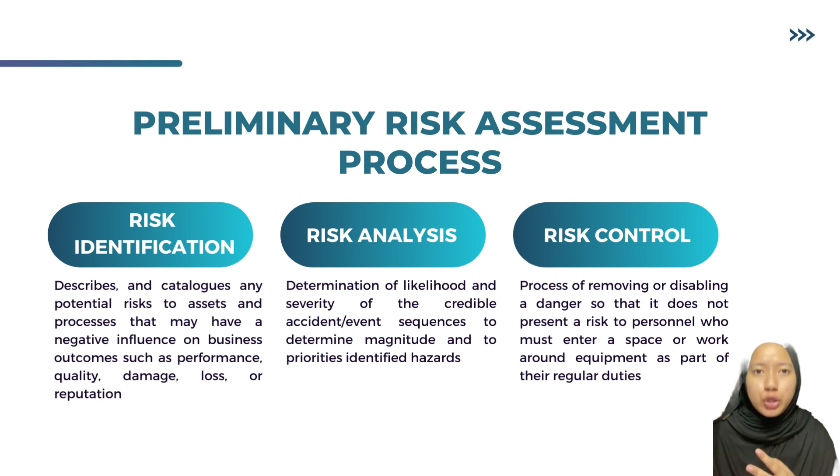The second one is risk analysis. We determine the likelihood and severity of the credible accident sequence to determine magnitude and to prioritize identified hazards. And lastly, risk control. This involves the process of removing a danger so that it doesn't present a risk to personnel who must enter a space or work around equipment as part of their regular duties.

In risk identification, we identify that there are four categories of risk. The first one is structural risk, which is related to the stability, strength, and condition of the structure itself. Second is environmental risk, which gives negative effects on the surrounding environment during the restoration activities.

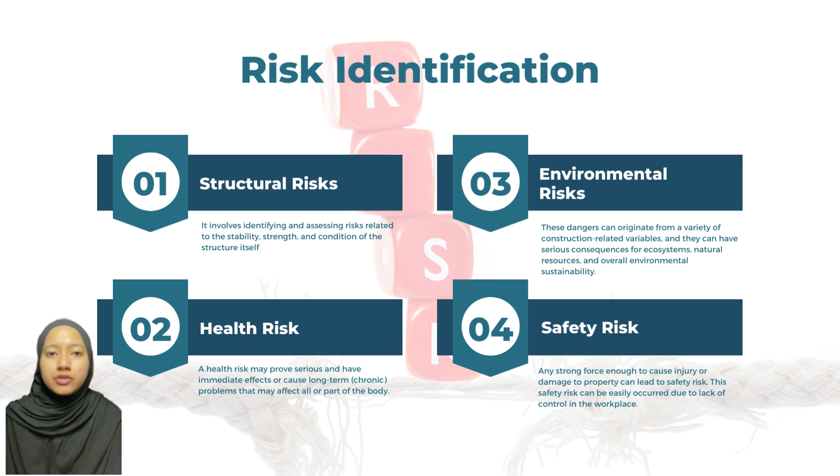Thirdly, health risk. It may have serious and immediate effects or cause long-term health problems that affect all or part of the body. Last but not least, safety risk, which involves strong force to cause injury to a person or property.

Risk assessment is the determination of the likelihood and severity of the credible accident or event sequences to determine magnitude and to prioritize identified hazards. To analyze risk, likelihood and severity will be used, and the result we present in a risk matrix to identify each risk for the Georgian mansion building. Risk can be calculated using the formula likelihood times severity.

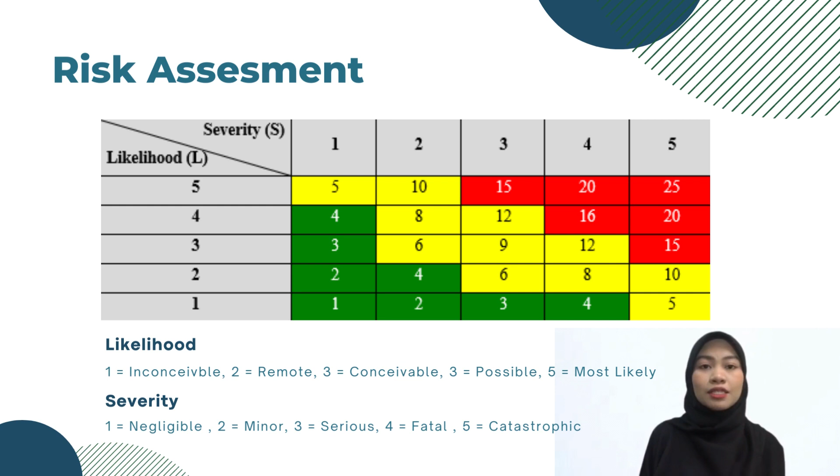A result with a value between 1 to 4 is labeled with green color, which means a low level, while the value of 5 to 12, which is labeled with yellow color, means moderate level. And lastly, the red color label, where the value is 15 to 25, is high level.

Risk control is a process to prevent danger from harming people, especially workers on the construction site that are exposed to the danger. Risk control is divided into several parts that can be seen in the pyramid. From the bottom, there is PPE, which is less efficient. PPE is used when alternative controls are ineffective and more protection is required. Personal protective equipment and clothes are utilized.

To correctly utilize and maintain equipment, workers must receive training to ensure they know how to use the PPE so that the PPE protects them from the risk. Next, moving to administrative control, a method or procedure designed to minimize exposure to a hazard. In most cases, administrative control uses a system of work to control the risk. For example, developing a procedure on how to operate the machinery safely, or limiting exposure time to a hazardous task.

After that, engineering control prevents the hazard from coming into contact with the worker, such as modifying equipment or the working space, using protective barriers and ventilation. The second control is substitution, where it is possible to complete the same task in a less dangerous manner. And the first method to control the risk is eliminating the hazardous job.

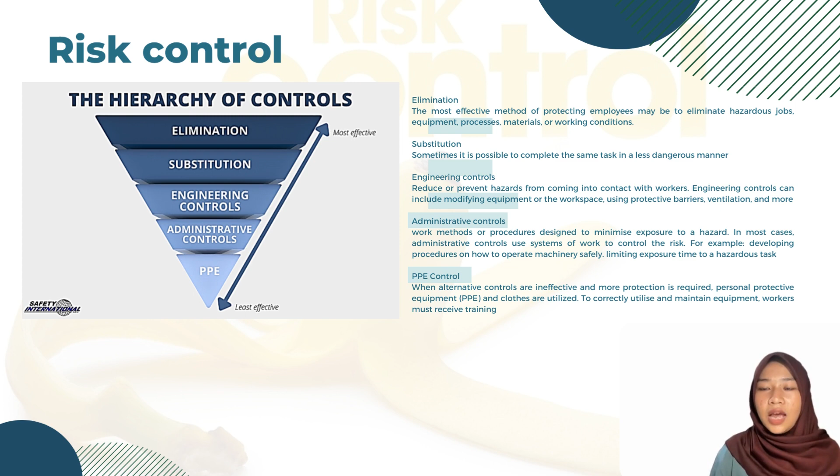HIRARC, hazard identification, risk assessment and risk control, provides a systematic and objective approach to assessing hazards and their associated risks that will provide an objective measure of an identified hazard, as well as provide a method to control the risk. Risk in Suffolk House, George Town, Penang can be divided into structure risk, environmental risk, health risk and safety risk.

Elements in the structure risk are structure assessment, structure repair and restoration of the architecture features. The elements in environmental risk consist of utilized machinery and equipment, also waste generation and management. Third is health risk, which consists of hazardous material removal, interior restoration and exterior restoration. Lastly, safety risk consists of electrical work, scaffolding and working at height, also the roof work.

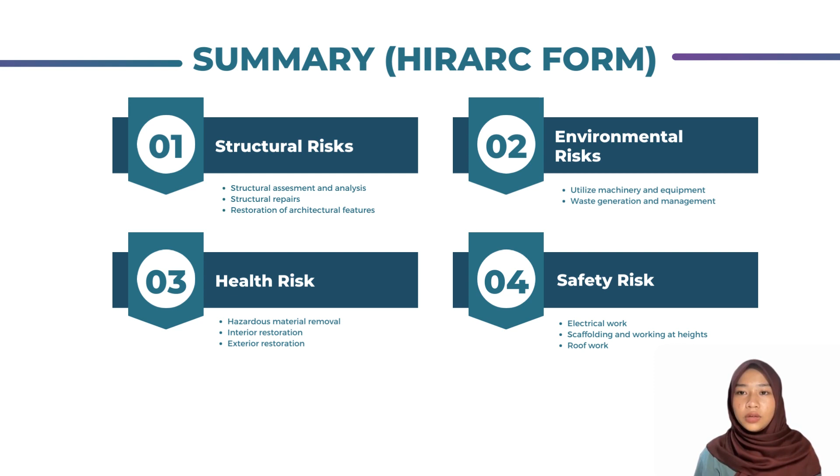Risk for the structure assessment and analysis. The work activity is structure survey and documentation. It has a potential effect of being struck by a falling object during the survey. Existing control is just using a safety helmet and other suitable PPE. The total risk analysis is 20, which is high, and this is controlled by engineering control to develop an emergency plan.

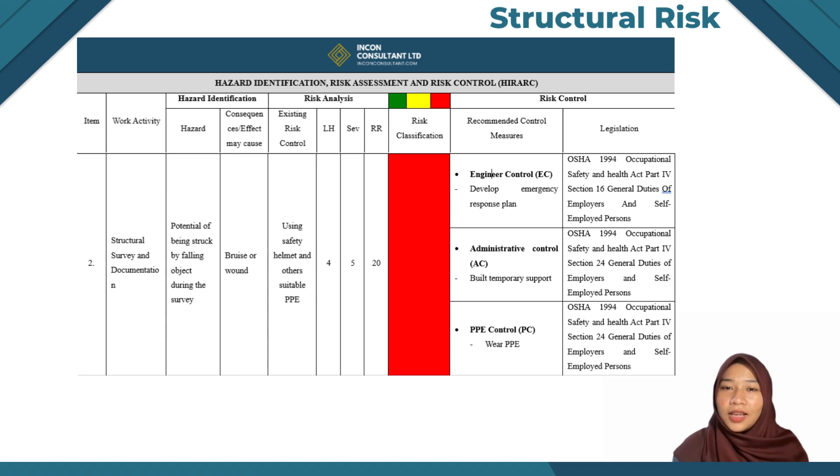The administrative control proposed is to build a temporary support, and the PPE control is the same as the existing control, by wearing suitable PPE with a suitable size. This can refer to OSHA Section 16 and 24.

Next is the main point, structure repair. The repairing activity is roof repair, which has the potential for a collapse or further damage. The effect from this hazard is a fall from height. This work activity gets 20, which is a high level. Risk control for this hazard is suggested as administrative control and PPE control.

Administrative control consists of following the structural engineer's orders, conducting regular inspection of the main structure, avoiding overloading of material during delivery, and documenting every assessment. For the PPE control, workers wear PPE such as a helmet and gloves. Each control refers to OSHA 1994 Section 15 and 24, duties of employer and self-employed person.

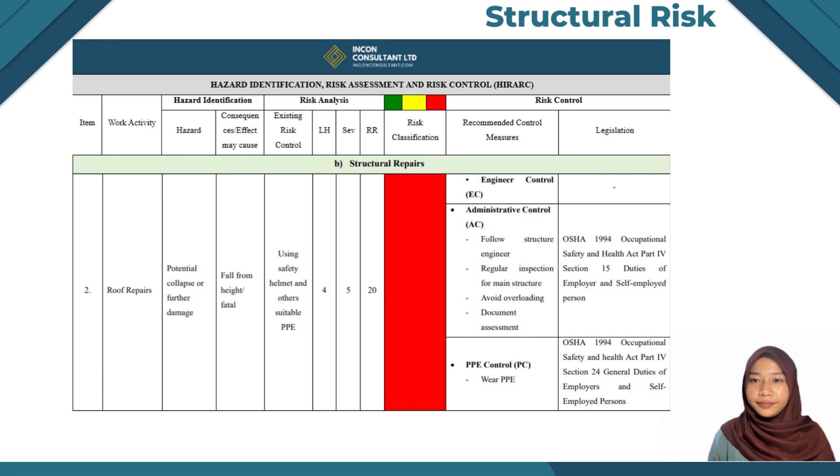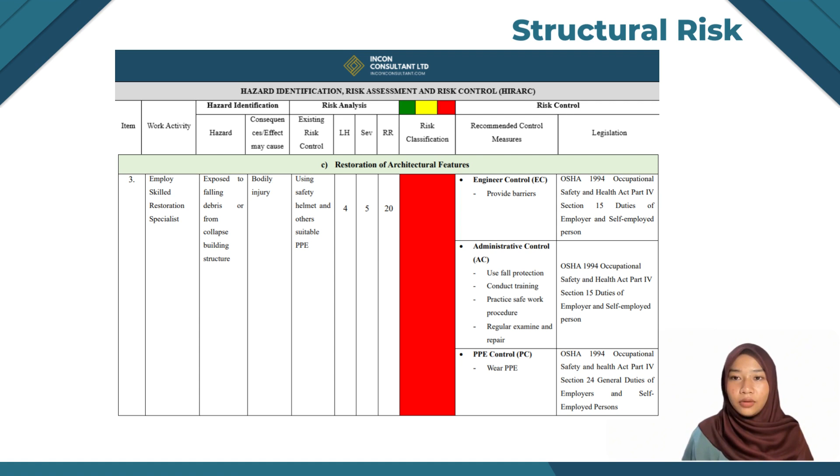The main environmental risk point is utilized machinery and equipment. The work activity that gets a value of 16, which is at a high level, is construction material handling. This work will be exposed to noise pollution. The effect of noise pollution will cause loss or impairment of hearing. Among the risk controls that can be taken to deal with this issue is the Occupational Safety and Health Act 1994, Part 4, Section 15, which is the duties of the employer and self-employed person.

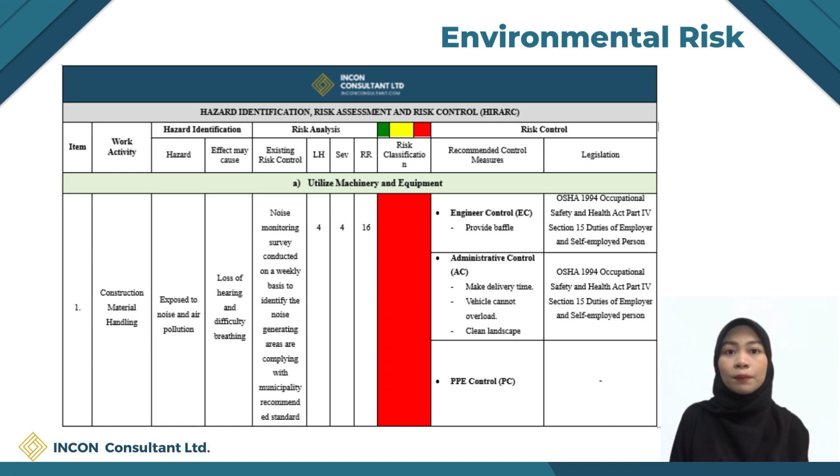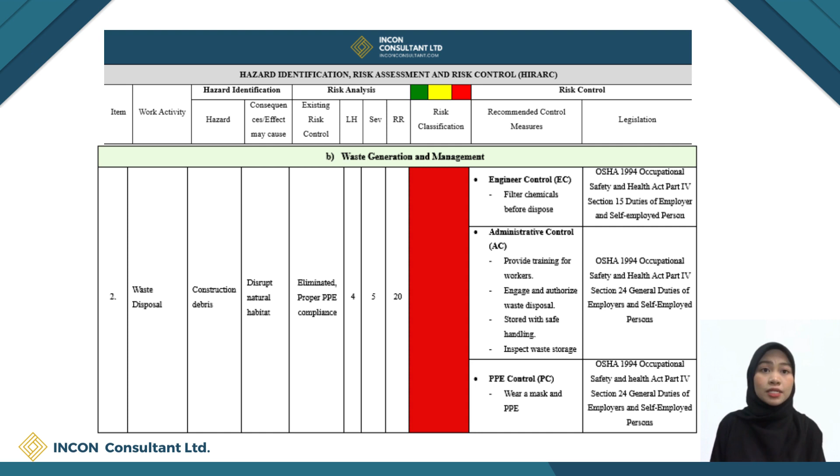The second point is waste generation and management in waste disposal. The hazard is construction debris, which got a value of 20, a high level. The effect of this activity can destroy the natural habitat. So, the step that can be taken to control this problem is administrative control, which is to provide training for workers. Besides that, OSHA 1994, Part 4, Section 24, which is the general duties of the employer and self-employed person, can also be used to control this issue.

Now we focus on the HIRARC form of health risk. The first point is hazardous material removal under personal protective equipment (PPE), which got a risk value of 16. The hazard of these work activities is PPE failure, and the effect is that body parts can get injured. The risk control that can be taken is administrative control, which is providing training, choosing appropriate PPE, and supervising to monitor important PPE among workers.

The second point is about exterior restoration, which gets the highest value, which is 25, which is high level under working platform and loading work. The hazard of this activity is improper safety protocol, which can cause slip, trip, fall, and can cause bodily injury.

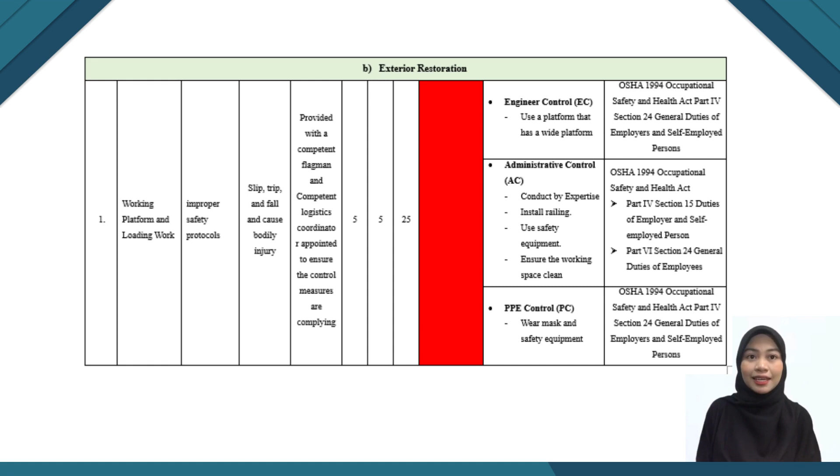However, the step to control this problem is with OSHA 1994, which is in Part 4 under Section 15, which is the duties of the employer and self-employed person. Meanwhile, there is also Part 6 under Section 24, which is the general duties of employees.

Regarding safety risks, we identify several hazards during the electrical work. When the technicians do the electrical testing and commissioning, they tend to be exposed to working at height. This could lead to serious injury from a fall during the installation and testing. This hazard can be prevented by providing mandatory PPE. The hazard can be classified as fatal.

To control the risk, it is recommended to use a stable platform, follow the SOP, ensure the working environment is clean, and wear safety equipment. This control should comply with OSHA Part 4, Sections 15, 16, and 24.

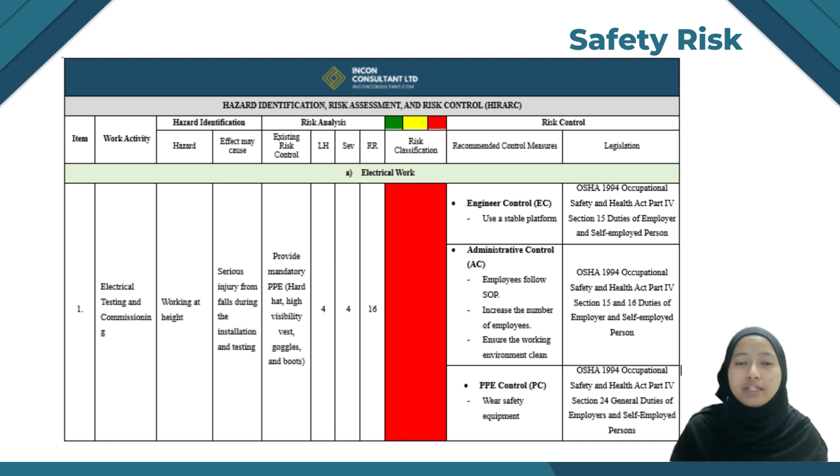During the scaffolding setup, the workers are exposed to unstable ground, which could lead to scaffolding collapse. To prevent this risk, a manual handling procedure can be developed. This hazard is classified as fatal, and it is recommended to follow the SOP, ensure the scaffolding has been checked by a qualified person, and wear PPE. This control should comply with OSHA Part 4, Section 15 and Section 24.

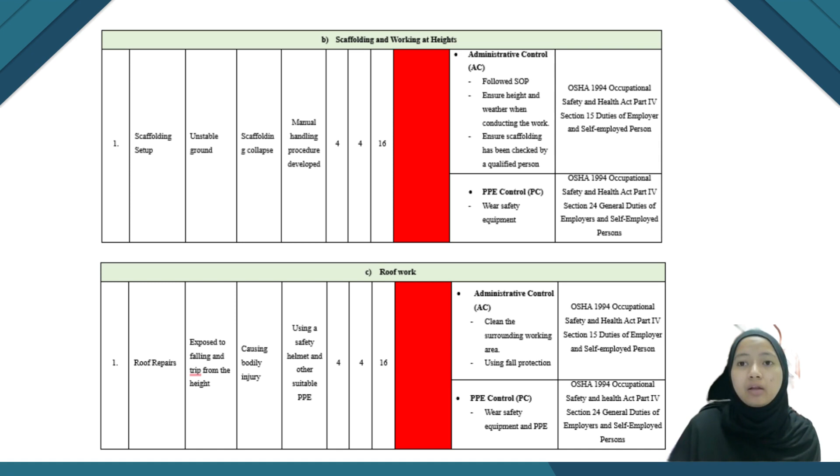Lastly, when working on the roof, the workers tend to be exposed to falling and tripping from height, causing bodily injury. The risk can be prevented by using a safety helmet and other suitable PPE. This hazard is classified as fatal due to the red color. It is recommended to clean the surrounding working area and wear PPE to prevent tripping or falling.

Now let's move on to our proposal on the emergency action plan for structural collapse at Suffolk House, Penang. The purpose of this emergency plan is to address the risk of structural collapse and provide guidance for an effective response. The objectives of the plan are to prepare for emergencies, mitigate risk, protect occupants, and minimize the impact of incidents. In this presentation, I will focus on two key phases of the emergency management plan, which are preparedness and response. Let's begin with the preparedness phase.

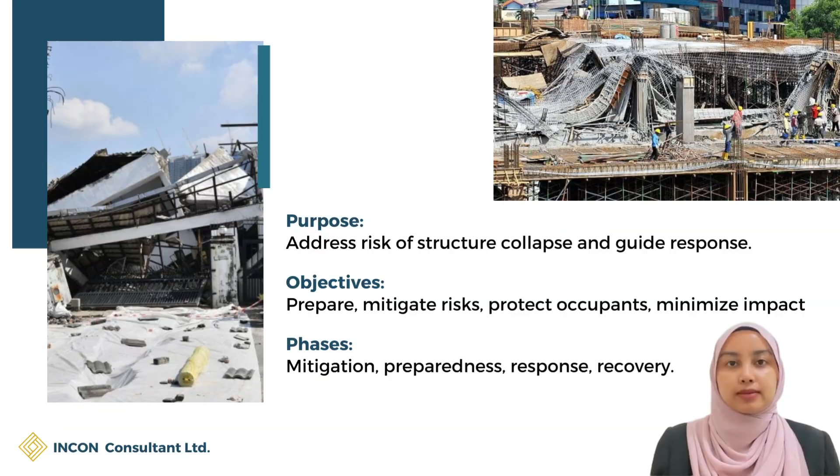This phase focuses on readiness and preparedness for emergencies. It involves steps such as developing an emergency response plan, outlining emergency procedures, providing training, conducting drills and exercises, and enhancing communication. In developing an emergency response plan, we create a comprehensive plan with clear roles, responsibilities, and communication channels. Emergency procedures are outlined, defining step-by-step actions for structural failure incidents, including evacuation routes and assembly points.

Training is essential to ensure stakeholders are familiar with the plan, procedures, and equipment usage. Regular drills and exercises are conducted to test and improve the effectiveness of the emergency response plan. Communication is enhanced to maintain coordination and situational awareness among stakeholders.

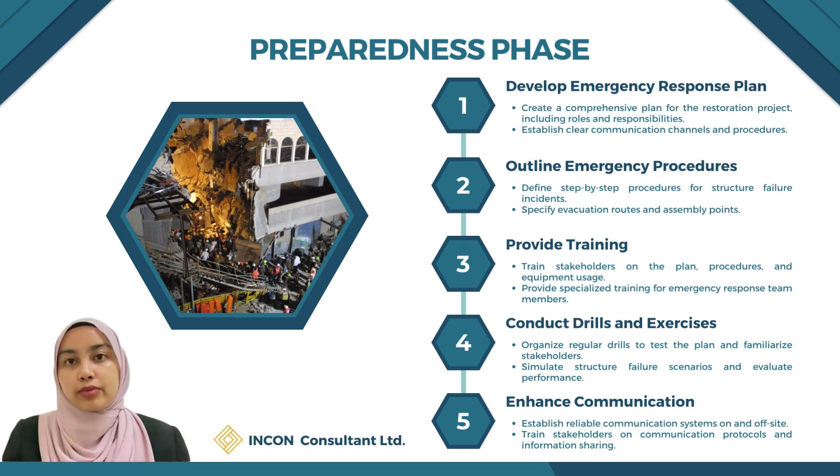In conclusion, both the preparedness and response phases are crucial in emergency management. By following the steps outlined in the preparedness phase and implementing the immediate response protocol during emergencies, we can effectively protect lives and minimize the impact of incidents. Thank you. That concludes our presentation of the HIRARC recommendation report and the emergency action plan for structural collapse at Suffolk House, Penang.